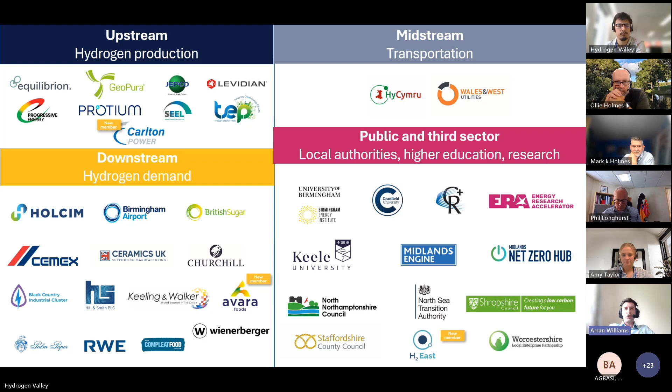I thought it'd be worthwhile to start today by setting the scene, because there's been quite a lot of updates for those following in the hydrogen world over the last few months. If we just hone in on a few of these - there's too many updates to run through, but at a really high level.

In April, we had the HAR2 projects shortlisted - this is the second hydrogen allocation round, which awards funding for electrolytic green hydrogen production projects. There were 27 projects shortlisted across England, Scotland and Wales, and it was really great to see that 3 of those are in the West Midlands specifically. 2 of those are by Carlton Power, and Eric will be taking us through those a little later.

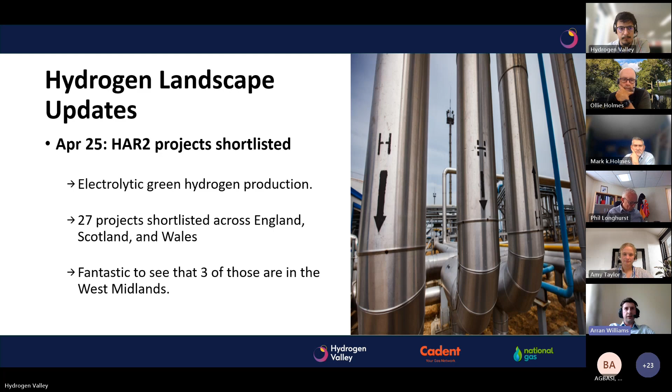Early this month, we also had the comprehensive spending review. This saw £500 million of funding committed to the UK's first regional hydrogen transport and storage network - a really big step forward for getting hydrogen to industry that needs it. We also saw commitment to CCUS projects, including the Viking and Acorn clusters, which are really imperative for the wider hydrogen projects they're involved with.

Just this week, we saw the industrial strategy launch from government. This laid out 8 key future growth industries, one of which was clean energy, and hydrogen plays quite a big part within that clean energy plan. This saw commitment for the continuation of those hydrogen allocation rounds - we'll see a HAR3 next year and a HAR4 from 2028. It also confirmed that the first hydrogen transport and storage business models will launch next year, as well as a hydrogen to power business model following similarly. We're hoping to get a bit more meat on the bones with all of these, as far as timings and whatnot, later this year in a revised hydrogen strategy.

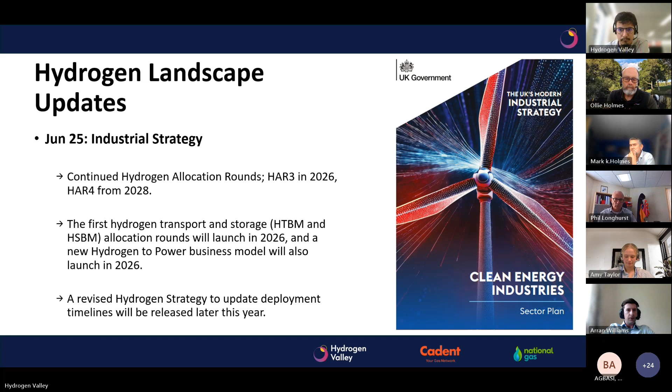Some other key points from that strategy: the government has also committed to consulting on extending the clean industry bonus to hydrogen projects, which will unlock further funding for hydrogen projects, as well as removing the climate change levy on electricity produced for electrolysis from next year - that's going to really help drive down the cost of electrolytically produced hydrogen. Finally, they've made the point that they will continue assessing the case for hydrogen blending into the existing gas distribution and transmission networks, and transmission blending will be consulted on this summer. So some really big updates, and I think it really demonstrates that this is all moving forward.

So I've called this the Cadent update. It's kind of more of a Hydrogen Valley update, I guess, but really just bringing it all back to the Hydrogen Valley. So let's go to the next slide.

This is the map that we've shown for some time now. We've defined the Hydrogen Valley area, and we've demonstrated the potential for a Project Union pipeline to bring hydrogen from Bacton or from the South Wales cluster to industry across the Midlands. But what we're really keen to do now is dig down into the detail and understand exactly where the demand for hydrogen sits across the Hydrogen Valley area.

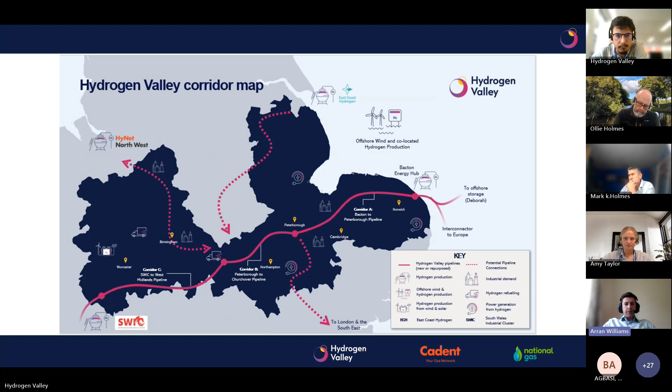So if you go to the next slide, I've been doing some work recently to do just that. I focused on the West Midlands view for today, but clearly the demand picture across the entire Hydrogen Valley area is important. To summarise some of the findings, first of all we've demonstrated that there are around 100 industrial sites considering the use of hydrogen as a fuel to decarbonise across the West Midlands. So clearly the appetite is there.

It's also great to see that this represents a really wide range of sectors, including ceramics, automotive, metal, paper, food and drink - just naming a few. I think that really helps challenge some of the assumptions that it isn't just heavy industry that is looking for hydrogen.

We can also start to see the emergence of some distinct clusters. I don't think it'll come as any surprise - it largely follows the urban centres within the West Midlands, but we can see really strong demand in and around Birmingham, Wolverhampton, and Stoke up to the north.

So where this is all going is thinking, how can we supply that demand? I've put the Project Union pipeline, which comes down across the south of that area, and it's quite easy to see how that could link in and meet those demand hotspots.

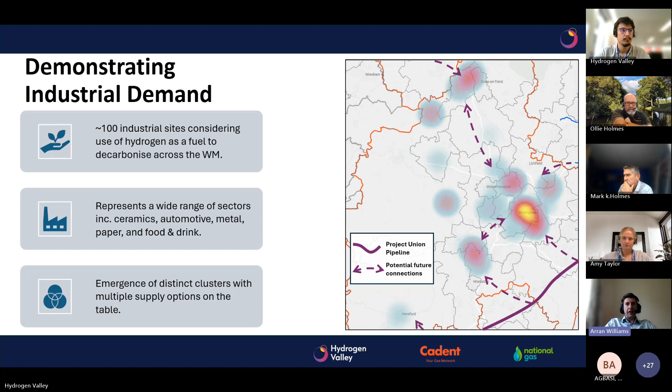So that is it in a nutshell. And I will now hand over to Amy, who will give us a quick update on communications.

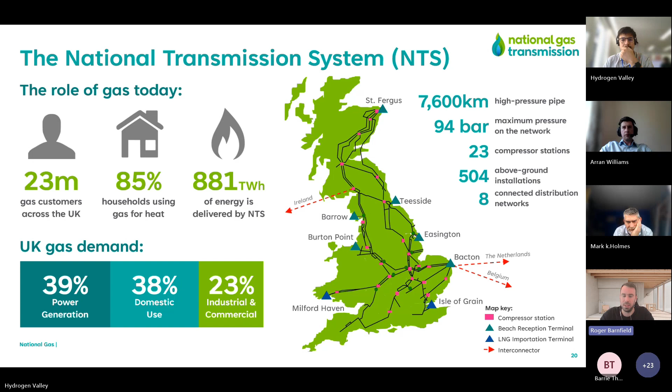Our interest in hydrogen is that we're looking at building Project Union. Project Union is a hydrogen backbone that aims to span the whole of the UK. We're looking initially at approximately 2,500 kilometres, about a third of the size of the existing natural gas network. What we're looking at doing is connecting strategic locations of supply, demand and storage, primarily targeting the industrial clusters so we can connect the largest and most developed users together.

But I think the real key part of Project Union is that we're going to be connecting to storage. While in the early stages of the hydrogen network supply and demand may not balance completely, we've got that certainty of supply so that we can make sure users get the power they need to run their processes.

Our approach is that we are looking at using new and existing infrastructure. A key part of Project Union is that we're looking at repurposed pipelines on the natural gas network that we potentially could transition to hydrogen. There's obviously a technical challenge there about how we do that, which me and my team are working on at the moment, but clearly there are significant benefits - time, cost, environmental impact. If we can meet that challenge, we can start developing this hydrogen network a lot quicker and roll it out sooner at a lower cost to the end user.

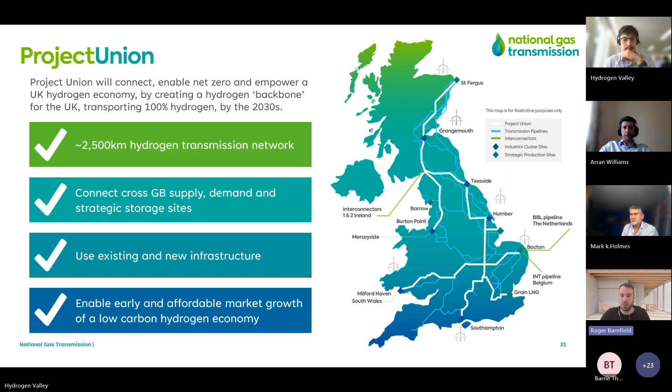A little bit more of a breakdown on Project Union, more on the phasing strategy. We break Project Union up into 9 regional sections, broadly aligned to the industrial clusters we've identified. Although we've got numbers to these, the phasing is still a little fluid, because hydrogen is developing at different rates in different areas. So this is our initial view as to what it will look like.

What we are clear on is that East Coast is going to be going first. That's key because it's one of the few locations in the UK that has access to storage. Once we build out from East Coast, every area after that will also be connected by default to that storage, so they'll get those benefits when the build out carries on. I think the other reason for East Coast is that it's located quite centrally, giving options to build out north up to Scotland for green renewables, west towards projects such as HyNet, and south down towards the Hydrogen Valley region. So it's a really good starting place to expand from.

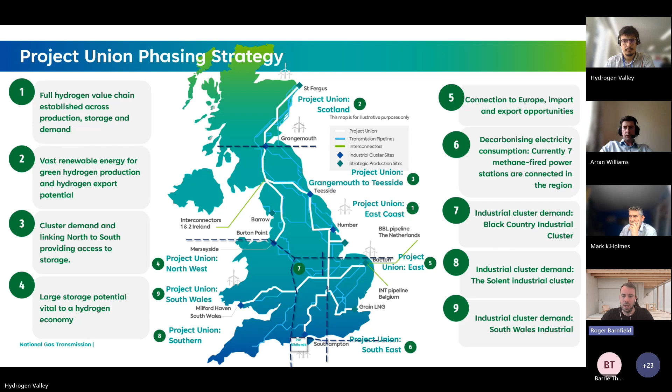Again mentioning East Coast, the reason for this is that we had a final determination from Ofgem last week that provided us with funding of approximately £40 million. That will enable us to progress with the FEED stage of East Coast. For us that's obviously great news - it means we can now progress our plans in the East Coast region, and start doing the next stage of studies to think about how we actually develop and build this.

So in terms of the hydrogen economy as a whole, this is a really positive signal that Ofgem agreed there is a need for this network, and they've put some funding behind it so that we can make progress and start moving our plans forward.

I think to give a bit of an update as to where we are with the other section, we've also submitted reopeners for the north section, which goes from Teesside up to St Fergus, and for the northwest section, which goes west across to projects such as HyNet. We've not put reopeners in for any of the other sections yet because Ofgem have basically said they're not going to accept any more reopener submissions at the moment.

So what we need to do is wait until the HTBM process kicks off before we can submit any kind of further plans. As Arran mentioned at the start, that looks to be around the 2026 timescale. So we are looking at progressing that as soon as possible, and we are talking closely with government to try and move that forward as quickly as possible and get some certainty as to what that process looks like, so we can start progressing the subsequent sections that will connect effectively alongside and connect into East Coast.

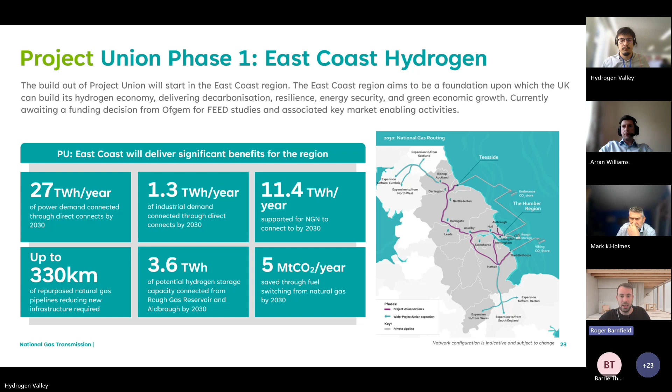So I think that covers the slides I wanted to go for. There's another one with our contact details, and obviously we're willing to take any questions, or if you've got any kind of thoughts after the meeting, please get in contact. We're keen to hear, and anything we can take on board to shape our plans will help us ultimately.

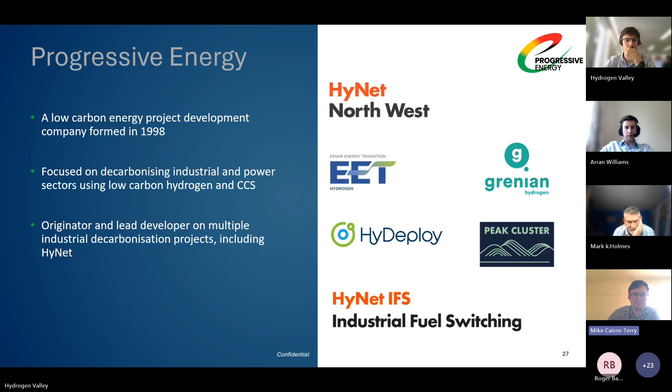That enables capture from industry, including energy from waste, so we're capturing carbon from biomass, getting access to negative emissions. Cadent is looking after the hydrogen distribution pipeline, so once we've produced hydrogen, we'll be able to transport it to users. A key part of this is the large-scale production of clean hydrogen, initially from natural gas with carbon capture, which is being developed by EET.

A key part, as has already been mentioned on the call, is that once we have low carbon hydrogen that we're producing, that's only worthwhile if we have people ready to use it. So mostly today I'll be talking about our work with potential users.

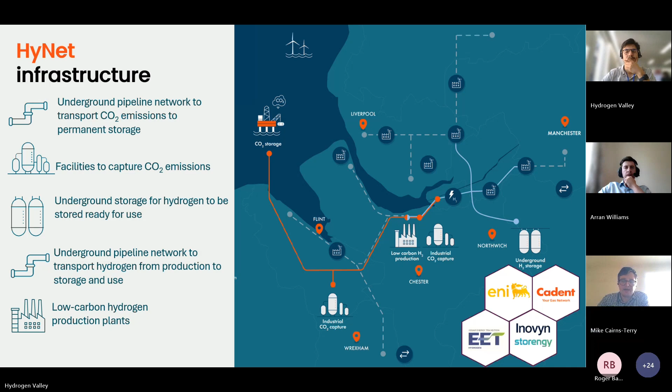Next slide, please. In fact, let's skip to the next one. Since 2019, we've been working on industrial fuel switching competitions with government, initially with BEIS, now with its successor, the Department for Energy Security and Net Zero. These are competitions run by government that provide funding to work with industry to demonstrate hydrogen in their processes, with the intent of getting them to the point where, once hydrogen is available to them, they're ready to commit to using it. So we've done demonstration projects with Pilkington's float glass industry, with Kellanova, who make Kellogg's Foods, with Unilever, and with Novelis in the metal industry, as well as feasibility studies with others in the food industry and the paper industry.

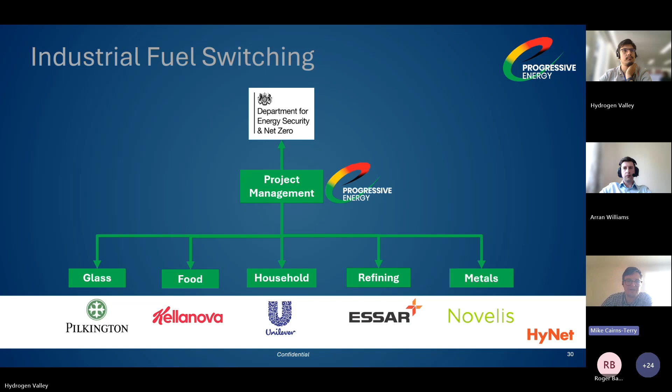We've also done CHP work, so development of a combined heat and power plant at Essar. Next slide, please.

So when we go to a site, our aim is to bring them to the point where they're able to commit to using hydrogen once it's available. There are a range of concerns that users typically have, some technical, some commercial. The first is product quality: is the product seen by the consumer going to be affected by the use of hydrogen? Then regulatory compliance: are we going to be able to operate within our existing permits, will we hit our NOx limits, will we be able to do it safely, will our equipment last? And then commercial concerns around what it's going to cost us to convert, and security of supply, so what do we do if hydrogen's not available one day. All of those questions we address by the IFS program.

Then there are other commercial concerns, including low carbon credentials. Obviously, sites are only going to switch to hydrogen if it's cleaner than using natural gas, so that's handled by the government's low carbon hydrogen standard, which essentially ensures that hydrogen production is only supported by government if it meets their emissions threshold of 20 grams per megajoule. Then there's the cost and efficiency aspects the sites are interested in. On the fuel cost side, the LCHA, the low carbon hydrogen agreement, essentially ensures that users will receive hydrogen at natural gas costs, and in the IFS program we look at efficiency of operation.

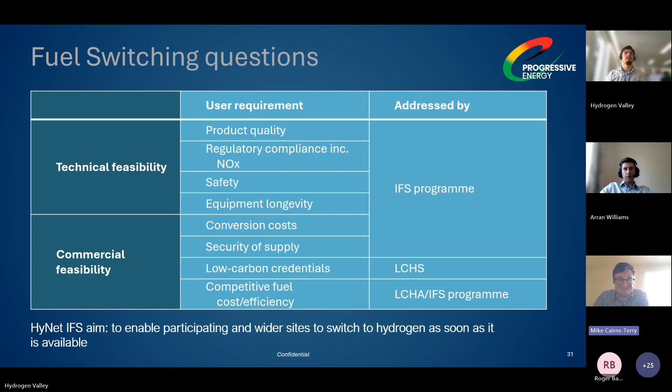So for technical feasibility, we ran feasibility studies at all of these sites to review the evidence base and assess whether there were any outstanding questions. Following that, we designed demonstrations to validate feasibility work, address any residual concerns, gather operational data on efficiency of operation, NOx, and product quality, and to develop commercial operating methodologies so that once hydrogen is available, we're ready to go.

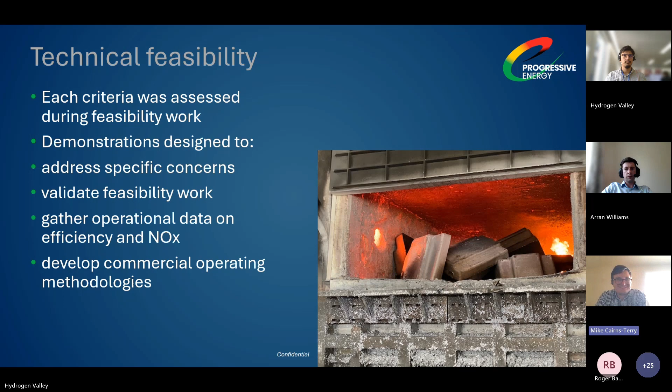The first demonstration we did was on a float glass furnace, the Pilkington St Helens furnace, which uses about 50 megawatts of natural gas fired across molten glass in alternate directions. The heat from the flames radiates straight into the raw materials, but also into the furnace structure. In terms of technical feasibility, Pilkingtons were concerned about heat transfer from the flame into the melt, NOx emissions, and impacts on their refractory. We primarily addressed this at feasibility stage through modelling, and Pilkingtons developed new luminosity modelling and a new model for NOx emissions as well.

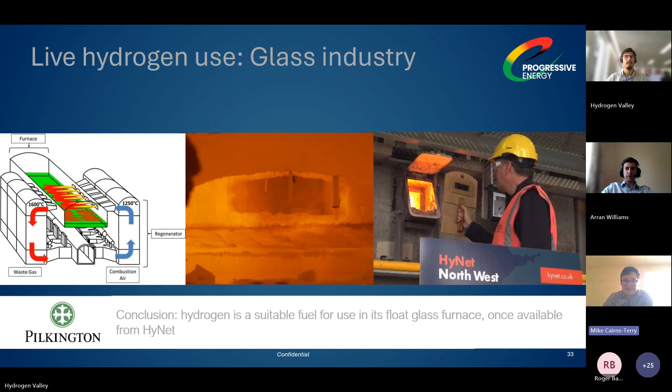The next demonstration we did was at Unilever's Port Sunlight facility - this is a package boiler. We converted a natural gas boiler to a dual fuel natural gas hydrogen boiler by changing the burner. We were able to show that we could meet the site steam load reliably over several weeks, so for something like 8 hours a day for 4 weeks, all of the site steam demand used in making Unilever products was ultimately derived from hydrogen, and we were able to evidence flexibility between hydrogen and natural gas.

We were able to operate within the existing NOx limits, modulate the burner effectively, and operate at comparable efficiency. Being a package boiler, the results of that are widely applicable to package boilers across the UK.

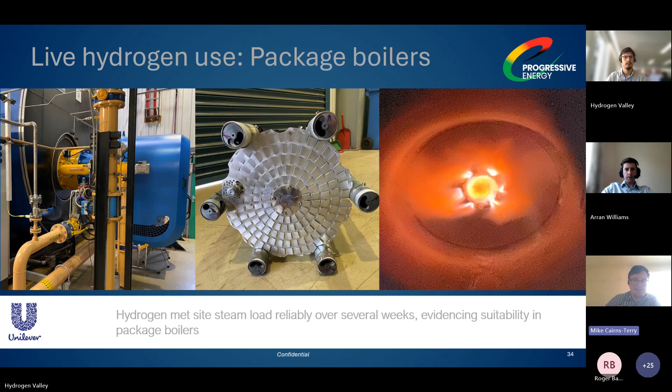Then we go on to a FEED study that we did with Essar on a hydrogen combined heat and power station to supply the refinery. That study gave us a really good view of equipment availability and costs, and is being taken forward now by EET Hydrogen Power to make that plant a reality.

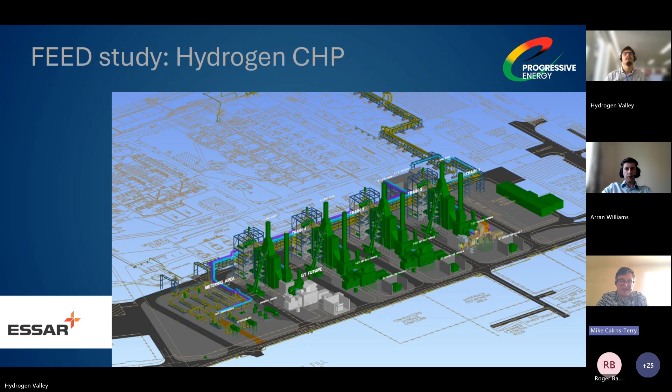The next one is the metals industry - a trial that we completed in February this year. We converted an aluminium recycling furnace at Novelis from a natural gas furnace to a dual fuel natural gas hydrogen furnace, and over the course of 2 weeks, we worked our way up from 0 to 100% hydrogen. By the end of week 1, we were melting out aluminium entirely based on hydrogen heat. We melted hundreds of tons over the course of the trial and maintained the product quality. So again, Novelis now has the evidence base to use hydrogen once it's available from HyNet.

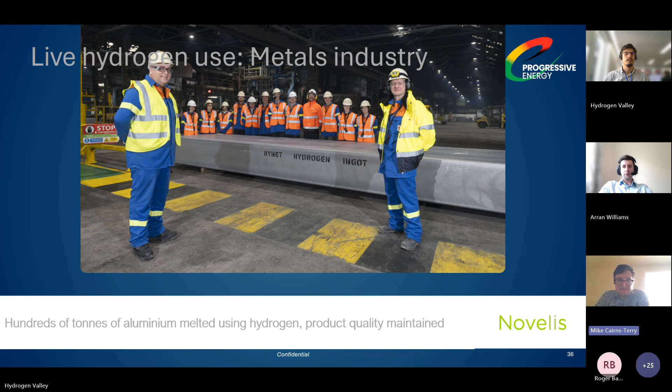The final industrial trial that we've done was with Kellanova. We executed a program in their Centre of Excellence, their R&D centre, where we were able to demonstrate on a production oven that you could produce their full suite of core products using hydrogen - Rice Krispies, cornflakes, bran flakes, Special K. We had a side-by-side comparison with natural gas.

On the left, you've got Rice Krispies made with natural gas; on the right, you've got Rice Krispies made with hydrogen. We're able to show that on hydrogen, we could meet all of the Kellanova quality standards, and that once it's available at scale, hydrogen is a suitable fuel for decarbonising Kellanova's operations.

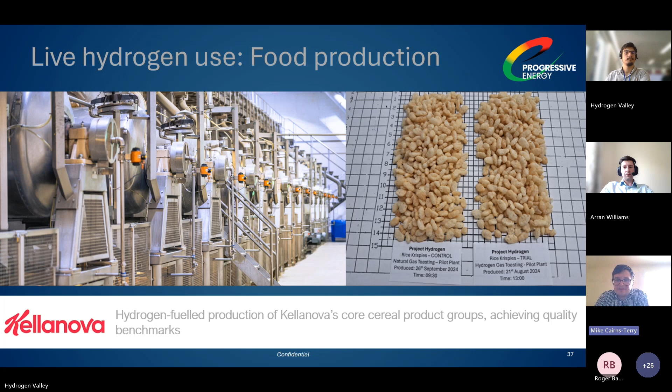Looking back at the trials and what we've learned from them, there are conclusions specific to those industries about hydrogen suitability. We can conclude that it's a suitable replacement for natural gas in all of the applications that we've investigated to date. We deliberately designed those trials to be applicable more widely than just those particular sites we were working on, and we were able to execute those trials using existing engineering design practices and standards.

There are sites that are very comfortable thinking about and working with hydrogen, and there are sites where that's more of a challenge. But we found that external expertise is available to assist site teams that aren't familiar with hydrogen, so that doesn't need to be a barrier.

Hopefully that gives you some insight into the work we've done and our efforts to develop the evidence base for using hydrogen once it's available. We're really keen to talk to anybody considering hydrogen and work with you on demonstrating feasibility in your particular processes.

Thanks very much, Mike. Really interesting. If I can ask a quick question, we'll also open up if anyone else has one. We've got a minute or two. Obviously we're able to demonstrate that hydrogen worked in those particular industries. You said at the end there that the hope would be it could be used more widely. Are we seeing that is the case? For example, the aluminium at Novelis, or other aluminium processors, are they able to take that directly and say, okay, we have the confidence now, or generally is it your understanding that they would want to do their own further trials?

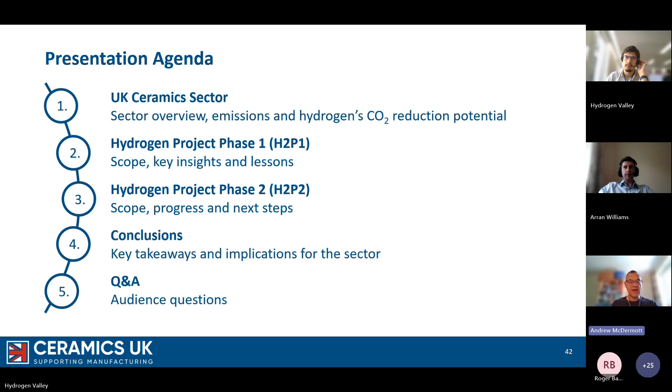Just a few facts and figures about the sector: about 20,000 full-time direct employees, annual sales across the sector about £2 billion, of which about 600 million are export sales. The key metrics to be aware of are we've got about 90 member companies and about 150 ceramic manufacturing sites scattered all over the country, and very few of those are near the large industrial clusters - we're very much in dispersed locations. So it's a key thing for the hydrogen discussion.

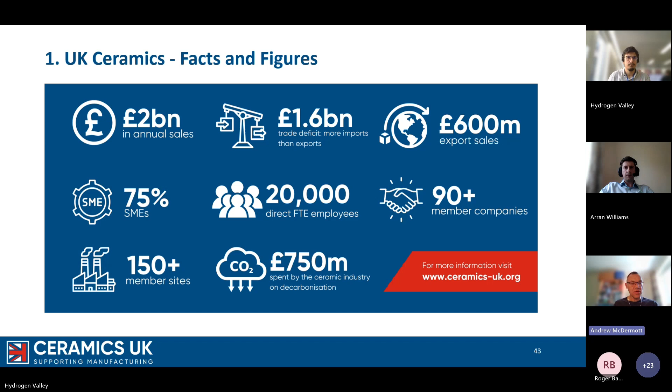If you can just knock me on another slide, please. From an energy and emissions perspective, a few more facts and figures: we're an energy intensive sector. We fire our products to a minimum of 900 degrees, more like 1,000 to 1,200 degrees, with one of our members firing all the way up to 2,750 degrees - phenomenally hot temperatures. So we're energy intensive, with energy and climate costs typically making up about half of total production costs. Had we done this event a few years ago it would have been more like 35%, but with the energy price rises, and that's such a big footprint in our costs, it's risen to more like 50%.

So we're gas intensive, about 4.5 terawatt hours per year across our members. It's about 85% of our energy mix, and the bulk of the rest of the energy use is electricity, but that's very much smaller than our gas use.

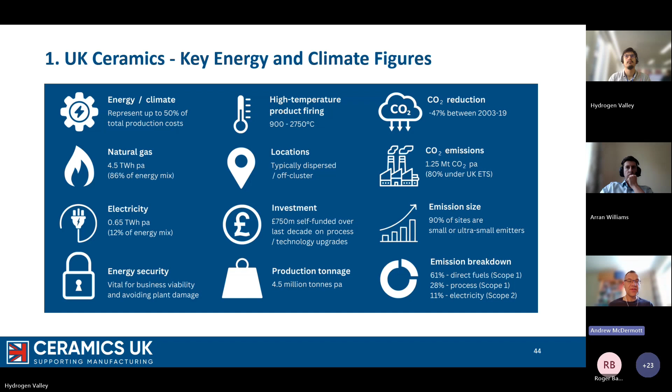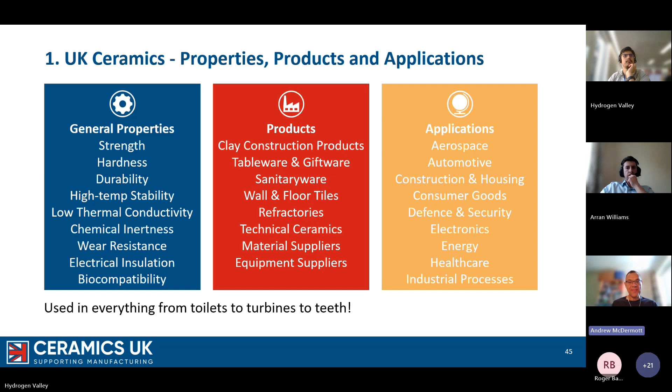So in terms of our emissions across the sector, about 1.25 million tonnes. Our Scope 1, Scope 2 emissions, the bulk of those are direct emissions, with the majority being fuel combustion emissions, plus then some process emissions as well, and the minority being indirect emissions from electricity use. A couple of years ago, we engaged with our members and updated our 2050 roadmap and cast our views forward in terms of what the decarbonisation technologies might be between now and 2050. They've all got a role, be it electrification, be it carbon capture, but hydrogen was seen as a very significant technology across the ceramic sector, accountable for the biggest chunk in isolation, a 36% reduction. So totting the numbers together, that could give us CO2 savings of about 450,000 tonnes per year across the sector.

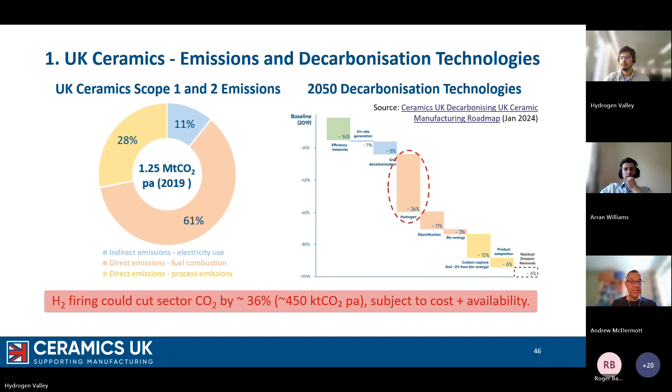Okay, next slide please. So in terms of the projects we've done, the industrial fuel switching projects have been in 2 phases. Phase 1 was very much a quick and dirty study. We did this in 2022, £300,000, BEIS funded project, 6-month duration. We worked with 12 of our member companies, and really the objectives there were to do a bit of a literature survey in terms of what's happening globally with firing ceramics with hydrogen, and there were little bits happening, but not a lot of work back then.

We wanted to demonstrate the firing of a range of ceramics with 100% hydrogen using a modified kiln that the glass sector had developed - they developed a pilot kiln. We wanted to modify that and use it to fire some ceramics. We also wanted to design a custom pilot kiln to look at that in much more detail and to start thinking about phase 2, to look at retrofitting some production scale kilns. So they ran for a period of time instead on hydrogen rather than methane. And we also took a techno-economic model that the glass sector had developed, and we applied that without making any changes to it, to the ceramic sector.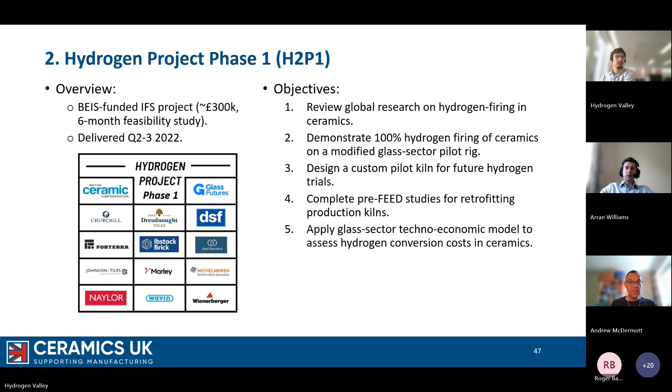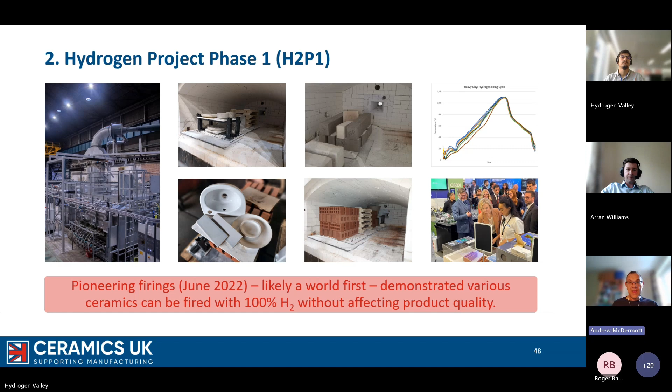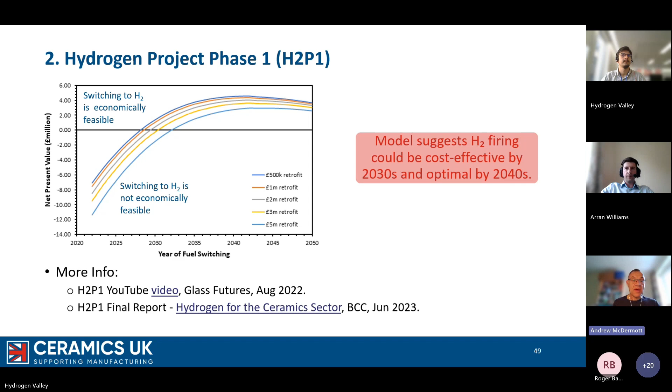So those firings, a world first, demonstrated that various ceramics could be fired with 100% hydrogen without impacting product quality. Next slide, please. We also looked at the techno-economic model that showed hydrogen could be cost effective by the 2030s and cost optimal by the 2040s. There are also a few links on there for a bit more information about what we did in phase 1.

Next slide please. So phase 2 - this was a DESNZ funded industrial fuel switching project, £6 million, 2-year demonstration study. I wanted to take the work we'd done in phase 1 and really expand that to demonstrate the technical and economic viability of hydrogen firing ceramics.

That covered 4 key work streams. We wanted to develop a bespoke pilot kiln to study the firing of various ceramics under various conditions. We wanted to look at the engineering, so we wanted to retrofit some existing production scale kilns which run on methane currently to run on hydrogen. We also wanted to pull apart that techno-economic model so that the assumptions and information was relevant to the ceramic sector, and it wasn't just taking something relevant for the glass sector which didn't necessarily fit us, and then to share that information across the ceramic sector and other foundation sectors, both in the UK and further afield. So that was the outset of the project.

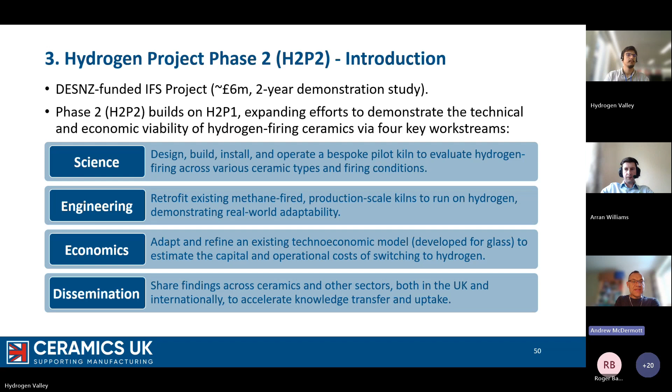Next slide please. So 8 work packages for those 4 facets of the project. Work package 1 was about specifying that kiln, getting it built, delivered, and commissioned. Work package 2 was then about using the pilot kiln. For the engineering side of the project, work packages 3, 4, and 5 were the engineering production demonstrators that we hoped to do. We did set out to do 3 with an eye to doing 2, and that's where the project was for the bulk of its time.

Unfortunately, both of those over recent months have fallen by the wayside, more for reasons outside of the project. The 2 main demonstrators, one stopped in December and one stopped a couple of weeks ago in May, so unfortunately that bit of the project's not progressing now. The other bits are - techno-economic modelling continues, ditto dissemination.

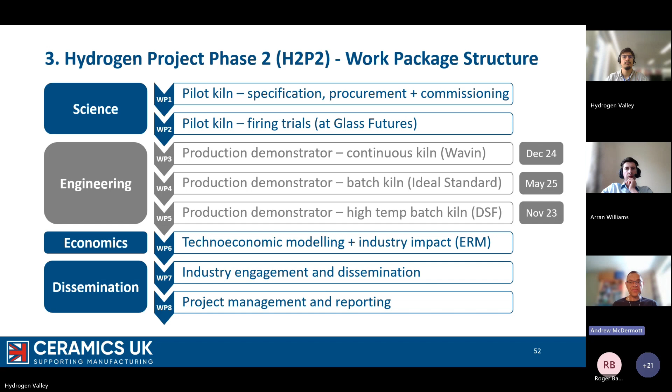Next slide please. So just in terms of where we are now with that pilot kiln, we've had it specified, built, delivered, installed, and commissioned. It's running on methane and hydrogen and blends of the 2. The only thing we haven't done yet is run it under reduction conditions, in an atmosphere starved of oxygen, and we've deliberately held off that just in case there's any impact in terms of damage to the refractory. We didn't want to damage the kiln, which would then hobble us from doing the rest of the project. So we've kept that aspect to the end of the project, and in a couple of weeks' time we'll be swinging onto that.

So it's quite a big pilot kiln, 4 cubic meters, 2.2 tons capacity, which can run up to a peak temperature of 1500 degrees. So it gives us a good volume to work with and to prove various ceramics can be fired with hydrogen.

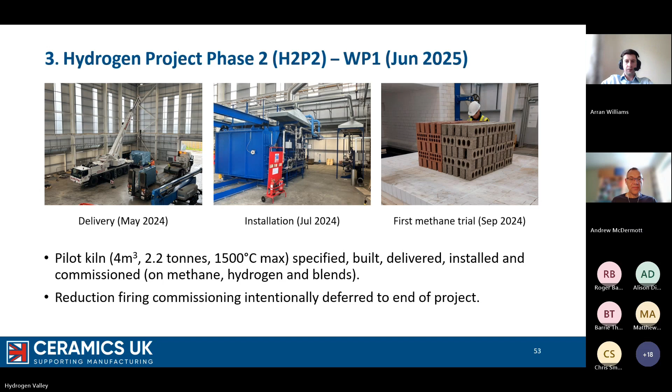In terms of actually using the kiln, the 2 main work packages are work package 2B, where we're taking 2 brick bodies supplied by Wienerberger, and firing those under a wide range of conditions - playing around with the peak temperature, going a bit hotter or colder, looking at the dwell times, cooking it for longer or shorter, playing with the fuel blends and firing atmospheres in terms of percentage of oxygen, and really moving the firing curve around and comparing what happens when we do it with methane versus hydrogen, to try and show if there are any differences in terms of firing with hydrogen.

Work package 2C flips that, and here we study a range of industrial ceramic products and fire those under the conditions set by the manufacturers. So you can see there, bottom left, we've got some sanitary ware - sinks and toilets from Ideal Standard - which have been glazed and gloss fired. The glaze firing has been done in hydrogen.

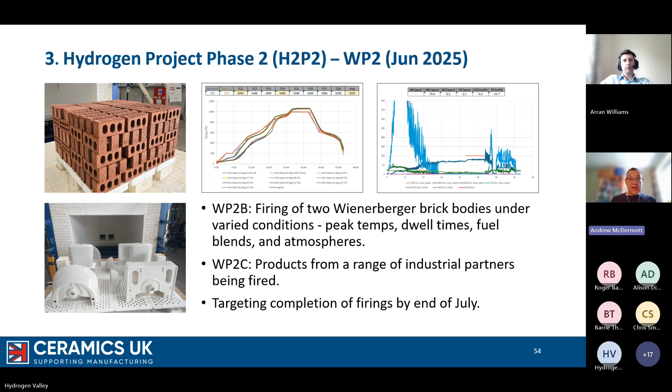Next slide please. Technical results: basically it's boiling down to we're not seeing any technical differences in terms of product performance. NOx has been mentioned because obviously firing with hydrogen, the NOx levels are a bit higher, so we've had an eye on where we fit with our emission limit values, and we're below that, even though the NOx results are higher than with methane, as we'd expect. So we've been probing and looking at that, but now we're at a point where the test results are starting to come back thick and fast.

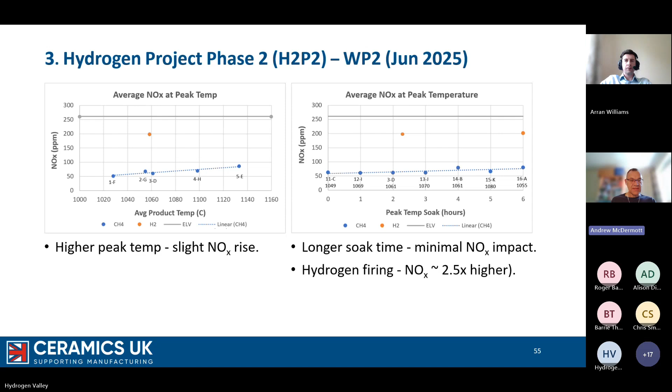Next slide. So going back to those production demonstrators, we did intend to do the 2 trials. The first one was at Wavin.

We were looking at a continuous kiln about 70 meters long that makes clay drainage pipes. We wanted to fire 2 of the zones on hydrogen, the peak temperature zone and one of the key warm-up zones, because if you can get those right, you can get it right for the rest of the kiln. Those are the tricky ones. So that was the intention.

We completed the feed studies, the pipeline and instrumentation diagrams, the HAZOP study, and the LOPA layer of protection analysis. That was all completed, so the next stage was literally to put spades in the ground and start to build. But there were a few changes happening on site at that point.

That meant we couldn't complete it in the time available, which is a shame, because what we found on that particular project was we didn't need to completely change the burners. We could use the existing burners with a few slight modifications. So that was one of the key bits of learning from that trial - it was more about burner modifications rather than a complete burner change.

The second demonstration was to look at a batch kiln making sanitary ware, Ideal Standard, and here the intention was to fire the kiln completely on hydrogen, no methane whatsoever, and to do that twice. We got it to the same stage, although with this kiln we found we would have needed 33 new burners to run the trial - we couldn't just modify the existing burners. It would have been a suite of new burners on that particular kiln.

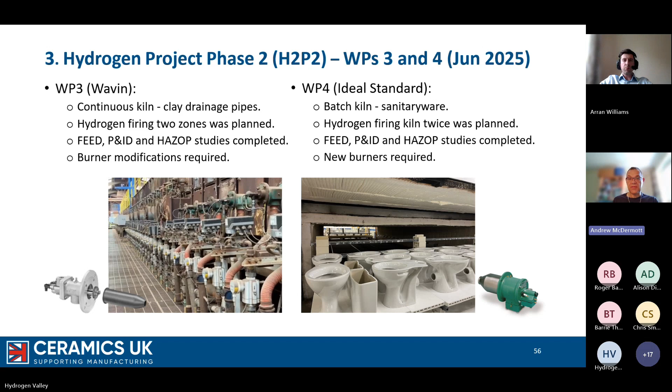Again, we took it as far as the next step, which would have been spades in the ground and starting to build. Next slide please - just skip over this one.

It's a techno-economic model. We've got 5 archetypes, which are basically models of different facets of the industry, and we're running that model at the moment, generating results. That's been completed for us over the last couple of months, and we're very much in an active stage working with that techno-economic model. If you just skip to pretty much the last slide.

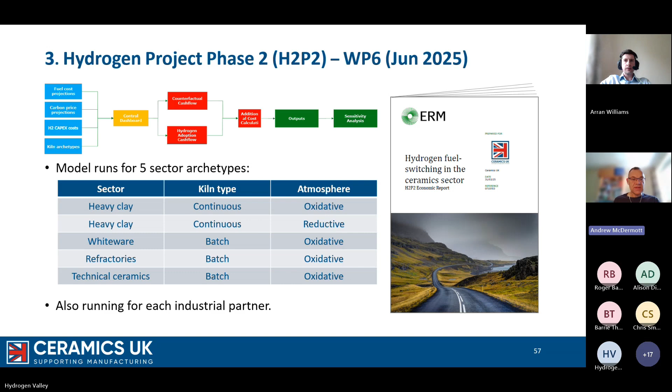What we've found is hydrogen firing could cut ceramic sector emissions by about 36%, 450,000 tonnes per year. In Phase 1 of the project, we showed that hydrogen could be used to successfully fire a range of ceramics with 100% hydrogen, with no loss in product quality.

Phase 2 - the different facets of the pilot kiln that's been commissioned, the trials are now well advanced. Early results are starting to filter through. We're seeing no real difference in terms of product performance, although we are seeing higher NOx levels as expected. On the production demonstrators, those retrofitting activities are not now proceeding, but we've gained a lot of information, a lot of key insights from those 2 detailed studies. So there's lots of learning which we can then share with our members.

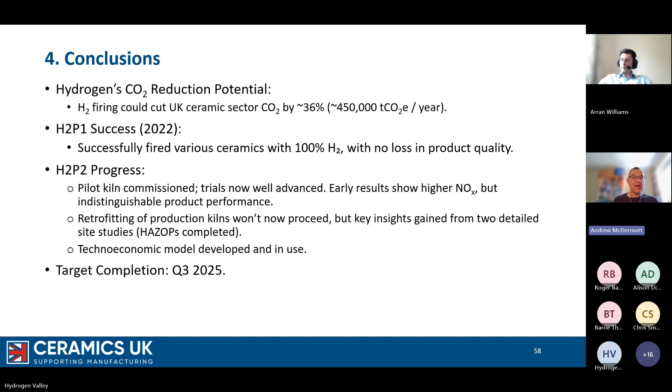We're very much at the end of the project now, looking to complete the pilot kiln work by the end of next month, and then we're into the thick of writing everything up. So that's it. I don't know if we've got time, Arran, for a few questions, or whether we'll come back at the end for those.

Many thanks, Andrew. We're a little bit tight - if there are any questions we can put them in the chat maybe, and pick them up if we have time at the end. I think that's probably the best. That's okay with you? No problem. That's fine, yeah, no worries. Okay, thank you very much.

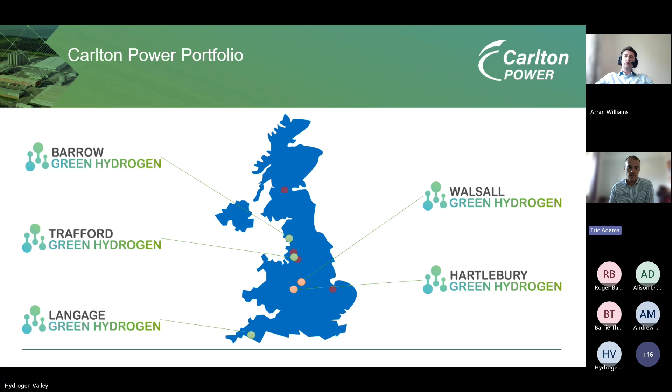A brief overview of how we do green hydrogen: the source is LCHS compliant electricity, but delivered via the grid. We do that because while you can do directly connected renewables, we don't feel you get a high enough load factor to produce enough hydrogen enough of the time to give to an off-taker and justify their expenditure to switch across to hydrogen. So having a very high capacity factor is important.

We then have the green hydrogen production, through electrolysis, typically in a number of 5 megawatt blocks. On site we also have some hydrogen storage, which allows us to do a bit of balancing between the intermittent nature of renewable energy and the intermittent nature of the demand side.

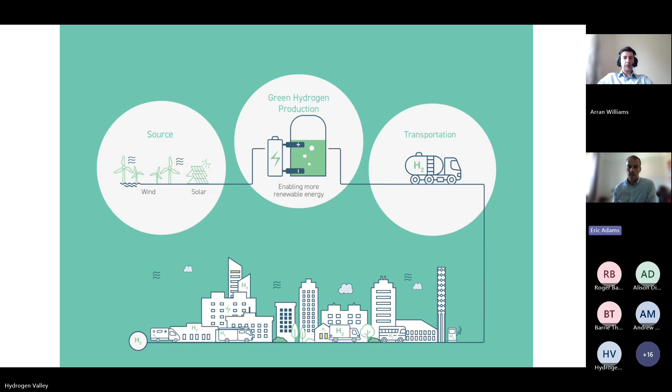For transportation, we seek to do projects co-located with the hydrogen off-taker, principally because we haven't yet got a hydrogen transportation and storage network, and it's easier to move electrons than it is to move molecules of hydrogen. In some cases we're also looking at tanker transport of the hydrogen between our production sites and the off-taker facility.

Trafford Green Hydrogen is an initial 15 megawatt project. 100% of the output will be delivered by tanker to someone in the ceramics industry, and they're currently using some of the work Andrew just spoke about to shore up the technical side and justify the commercial switch across to hydrogen.

The site itself is already consented up to 200 megawatts, so it's the largest consented green hydrogen scheme, I think, in England now rather than the UK. The site has got all grid connections secured, land secured, hydrogen production secured, and we've already got planning in place for a hydrogen pipeline and the ability to have a future connection to the gas network. That's one of our HAR1 projects, intended to enter construction this year.

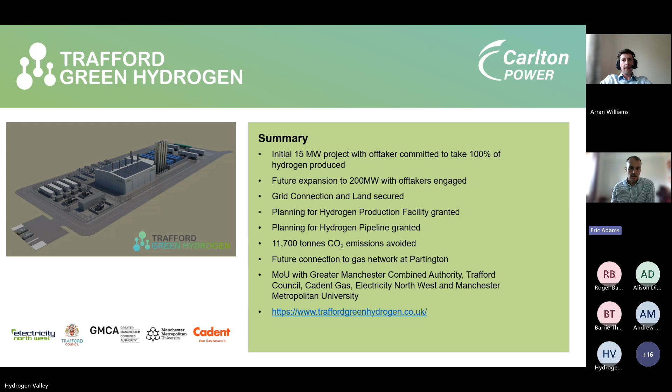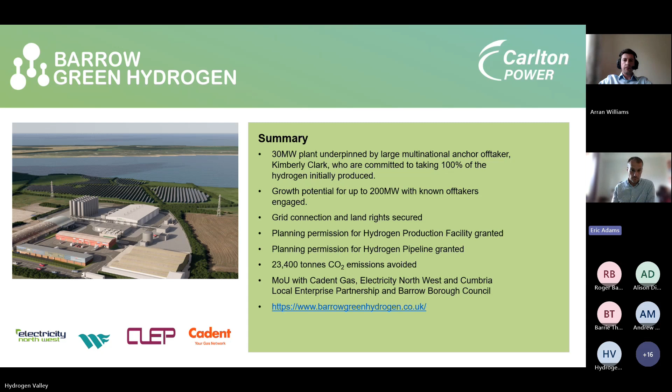Barrow Green Hydrogen is one of the largest schemes which secured HAR1 funding. It's a 30 megawatt project which will provide around 100 gigawatt hours of hydrogen into Kimberly-Clark, the tissue manufacturer, enabling them to switch the majority of their boiler plant from natural gas across to green hydrogen and bring about a reduction in carbon emissions of around 20 to 25,000 tonnes. That project is also intended to enter construction this year and deliver hydrogen into that facility from 2027.

Then the Langage scheme, down in the southwest, is a 10 megawatt scheme which will produce around 35 gigawatt hours per annum of hydrogen. That hydrogen will be delivered by tanker to two separate off-takers: one in the asphalt industry, the other in the food manufacture industry.

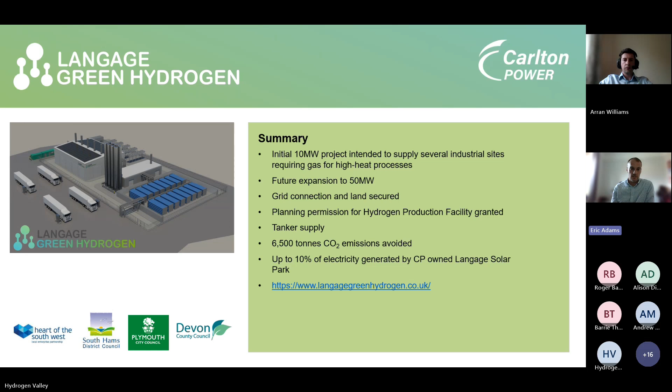An interesting thing about the southwest is that the counterfactual fuel, rather than being natural gas, is kerosene. That area has a very weak energy infrastructure, so there are a lot of large industrial facilities currently burning quite CO2-intensive kerosene instead of even natural gas. That's the third project under HAR1, which will get into construction later this year.

So one of the HAR2 projects is Walsall Green Hydrogen. This is a 25 megawatt project, will produce around 100 gigawatt hours of hydrogen, which will go into two off-takers in the ceramic industry. These are difficult to decarbonise industries by virtue of the limited availability of electrification options. We have the land secured, the planning in progress, the shortlisting under HAR2, and now we're working on how we put the project together to bring the strike price down as low as we can.

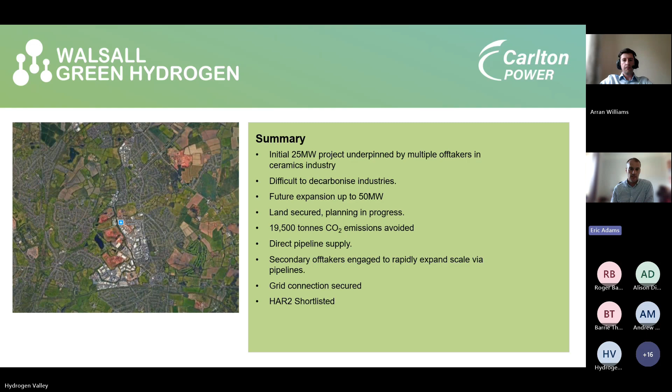And then if we go through to the next project, Hartlebury, again a 20 megawatt project, which will be around 80 gigawatt hours of hydrogen, underpinned by multiple sites within the ceramics industry. Again, difficult to decarbonise industries, and again HAR2 shortlisting, so we're working our way through to how we get to a reasonable price on that.

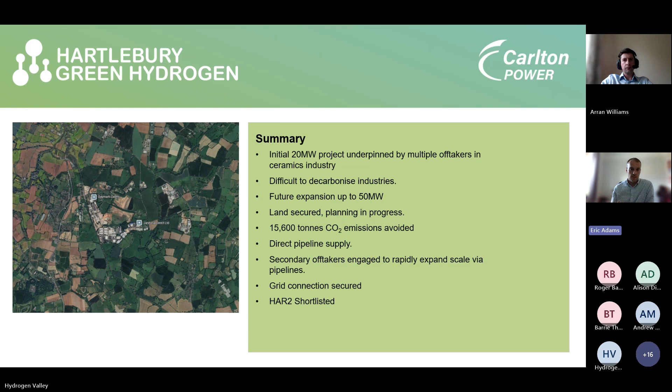So I wanted to bring out a little bit of the challenge of hydrogen, and principally how we reduce the cost. I think we can see from the HAR1 projects there's an average weighted strike price of about £240, which was felt by government to be higher than they expected. Ultimately the price came down to a function of the price of electricity, the equipment, and the demand. So let's look at how we bring some of those costs down.

In terms of the electricity supply, renewable energy is invariably intermittent and it delivers into an energy market or electricity market. There needs to be mechanisms whereby we can encourage the use of electricity from renewable sources the majority of the time into electrolyzers to produce hydrogen. At the moment, if an electricity generator has a decision between selling to the market at a markup or selling to an electrolyzer, they will sell to the market, and therefore that reduces the amount and availability of electricity for electrolyzers.

In terms of the equipment supply, CapEx is a key element. The performance in terms of efficiency and degradation is key, along with the commercial package around it. Cognizant that a lot of the electrolyzer manufacturers are currently coming out from being very much technology developers and now into technology suppliers, and that scale-up of their supply industry will take a little bit of time. But equally, to scale up that supply industry there needs to be a large demand for their product.

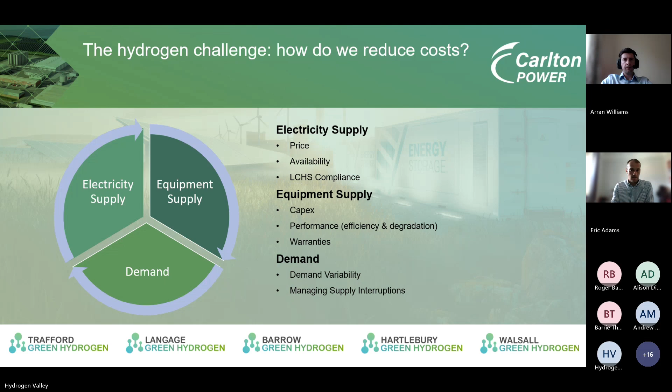That was everything I had to say, so happy to take any questions, either through the chat or directly.

No, thank you very much, Eric. Really, really interesting. As you say, it's nice to see how it all goes full circle amongst the talks - from the ceramics demonstrating the need, showing that it's technically feasible, and now to yourselves actually supplying some of those sites. That's really great to see.

You would have missed at the start, we did a brief recap on some of the announcements earlier this week on the industrial strategy. I just wonder if you have any thoughts with regards the removal of the climate change levy on electricity for electrolysis and some of the other announcements. Is that going to really help your costs?

Sorry, was that to me, Arran? It was Eric, I missed that completely. The announcements earlier this week with the industrial strategy allude to helping to reduce electric costs for electrolyzers through removal of the climate change levy and a few other bits and pieces. Do you think that's going to really help drive down costs, or is that a small change in the grand scheme of things? I think it's a start, but I think it's still got some way to go.

Some of the climate change levy costs were actually excluded from HAR1, so it was an excluded cost. So the prices we see on HAR1, just taking the climate change levy out in the absence of anything else doesn't actually move the needle on that cost, because it was already excluded. But it is helpful.